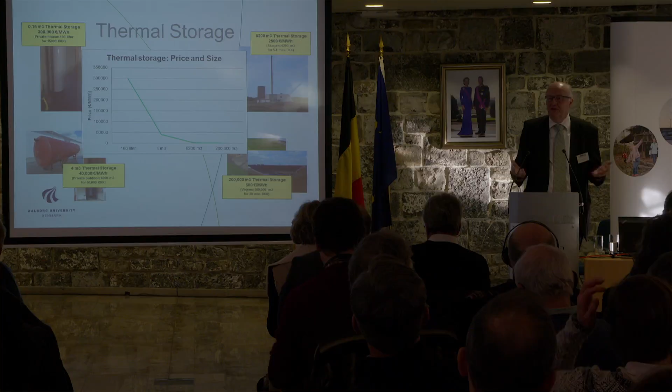And that's why I think that the community level is extremely important here, because if we group up as a community and own a district heating system together, then we have much better facilities, not only for storing, but also for solar thermal and waste incineration and recycling waste heat from a lot of things when we do all this.

Now, this is just to emphasize why the smart energy system approach is so important. When we look into the future, no matter if we do it in Denmark or for the whole of Europe, we use computer models where we model it on an hourly basis, because this is really important. And this is free, everybody can download it, and it's been used by a lot of researchers around the world.

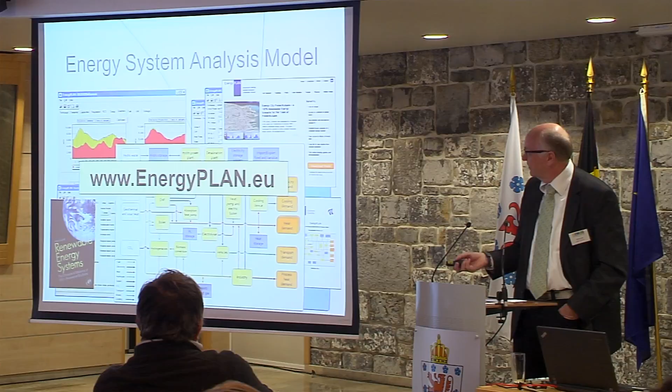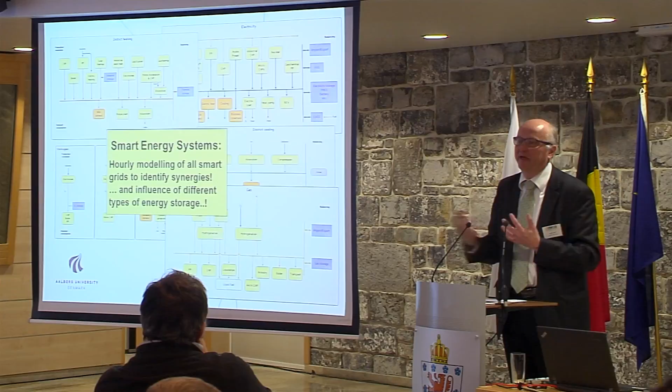But what I would like to stress here is, in that model that we have developed, we do hourly simulations, not only of the electricity, but also of the heating and the cooling and the industry and the gas and the green gas and power to gas and all the things all together. So we can play around with whether we should have electricity storage or thermal storage and so on and so forth.

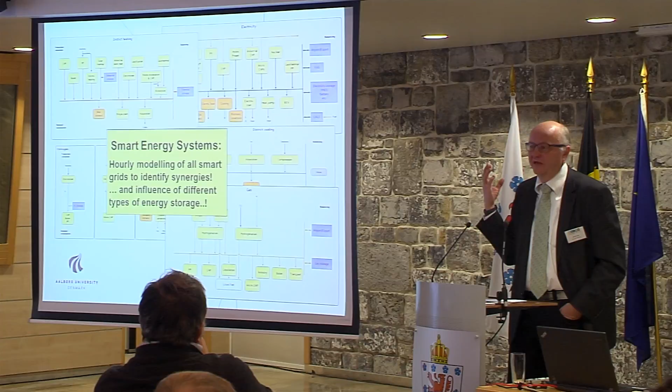And I can already say now the result is that we should not really have any electricity storage apart from the batteries we need in the electric cars. To buy electricity storage to integrate a lot of wind and PV is not really feasible. If we make these kinds of integrated solutions, we can organize it in a way so we can buy much cheaper storage options as thermal heat and as gas and liquid fuel, as I mentioned.

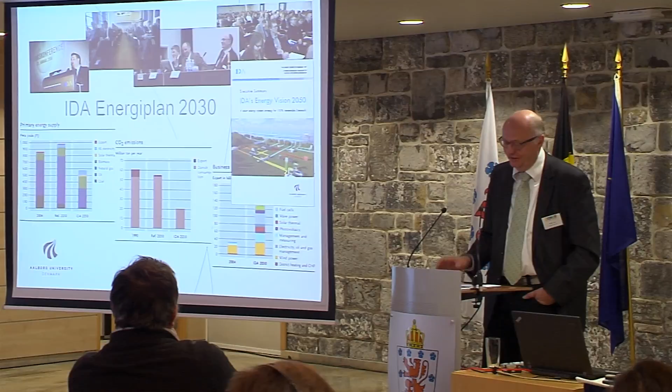We have done some scenarios on this in the Danish context. Some of them we have done together with the Danish Association of Engineers, starting in 2006, because in 2006 we had a government that didn't really care about energy, and then the industry and the engineers wanted to have this on the agenda again to promote the industry and all the things we were doing.

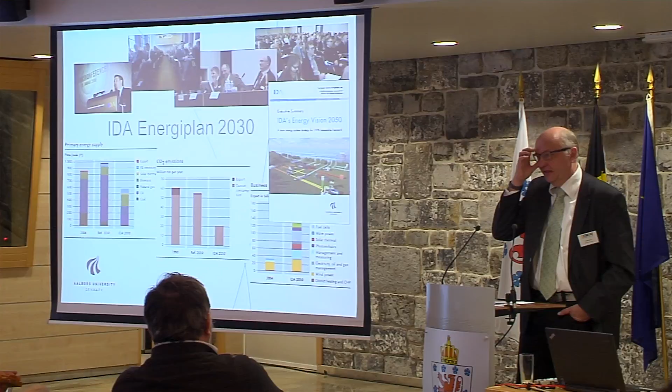And this actually ended up in that the Danish government, I don't know if it was exactly because of that, but it was at least the same year, in 2006 started to have the long-term target of Denmark being fossil-free, and later on it was defined as fossil-free by 2050 and without nuclear, which is the same as a 100% renewable energy society by 2050. That is the target of not only the government but also the parliament, and it's been supported now by at least 4 different governments and 4 different parliaments. So this is the target of the Danish government.

And they're not only saying this as a long-term target, we're actually also doing something. For example, the share of wind has now been increased. The target used to be 20% by 2010, and now it's 50% of the electricity being produced by wind power in 2020. And we are already at 40 as we speak, more or less. And a number of other things are being debated.

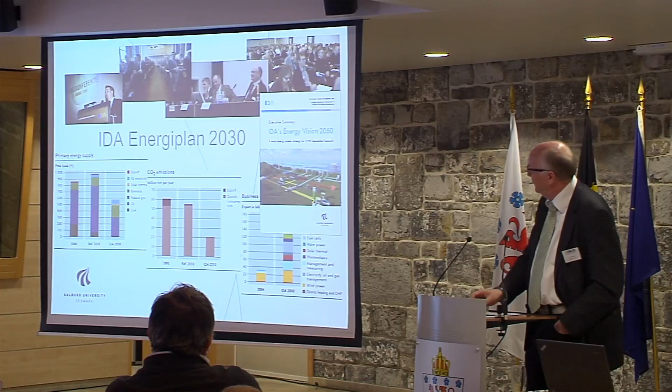But here we look at it, and what we found out is that it is doable to do 100% renewable energy in Denmark. We can find the resources in terms of wind turbines and PV and solar and whatever we need, and also biomass. But there are two really hard corners in doing this when we made the first investigations.

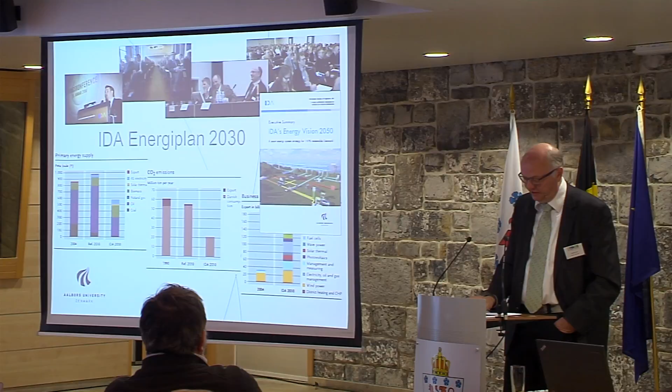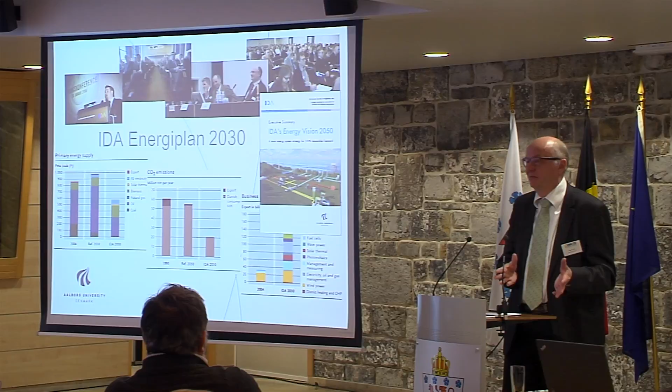The one hard thing is how much biomass can we allow ourselves to use within the energy system and still claim to be some kind of sustainable. That's one really hard question. The other really hard question is what to do about transportation. Yes, you can say electric car, and of course we should, but what about the airplanes and the ships and all these other things? So how should we do this?

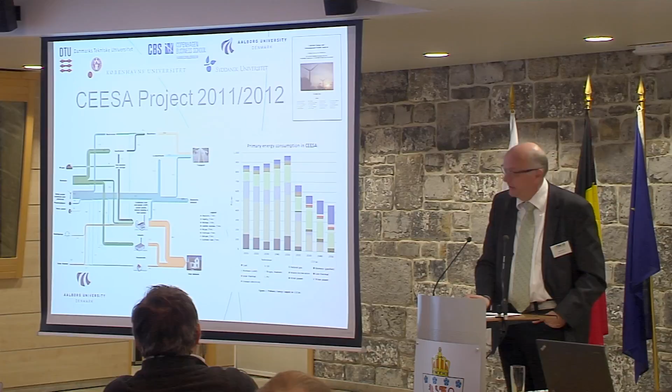Those were the things we took up in a project here that I headed with almost all universities in Denmark participating, and we looked closer into what to do about transportation and biomass. For transportation, as much electric vehicles as possible, electric trains or whatever as possible - that is the best way, the most efficient, the way that will demand the least wind turbines by the end of the day. So the more electric cars, but we cannot do everything electric car. There are the planes, the ships, the long distance transport and so on. So what to do about that?

Somehow we could produce some kind of green fuel, gas or liquid fuel, from biomass. But on the other hand, biomass is a limited resource. We calculated, for example, if we should do transportation in Denmark on rapeseed oil, Denmark is not big enough - if we grew rapeseed on all of Denmark, we couldn't do it. So there is really a challenge there, and we don't want to do only rapeseed because we also like something to eat.

And materials, if we don't have fossil fuels. Taking all this together and limiting ourselves to the residual resources of biomass - that is the manure that we can make gas of, the straws left on the field, the wood chips and so on, and also some of the waste. Well, we put that together, so biomass is a limited resource.

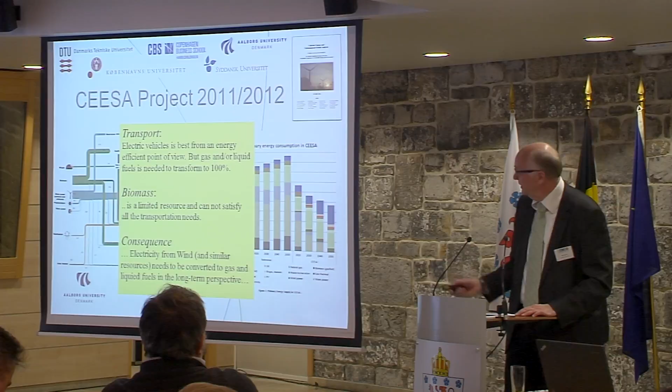But what we found is that if we take as much of that biomass and convert it into some kind of carbon that is liquid or gaseous, and if we then take some wind power and by electrolysis put it into hydrogen - and don't store it as hydrogen or use it as hydrogen, but add that hydrogen to the carbon and then produce some methane or methanol, which I believe is the most obvious way of doing it - then we can do it. Then we have resources enough and we'll do it within something that we can claim is a sustainable use of biomass. We call that concept electrofuels.

This is where we have some kind of electricity with electrolysis and put it into fuels. It can also be carbon. Personally, I'm not so fond of carbon capture storage, but I'm fond of carbon capture recycling or carbon capture utilization, as somebody calls it. So if you capture some carbon from whenever you burn something at the power station or whatever, and recycle it together with hydrogen, that could also be an option.

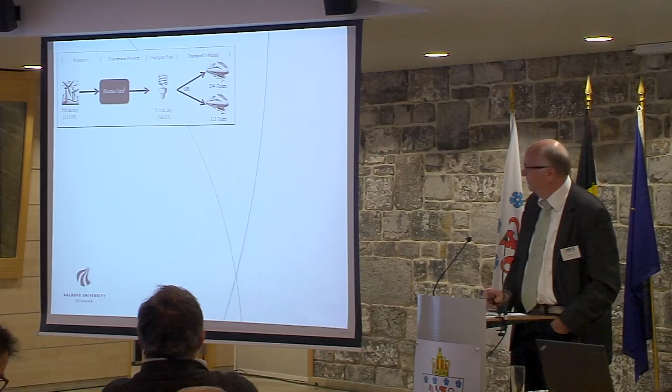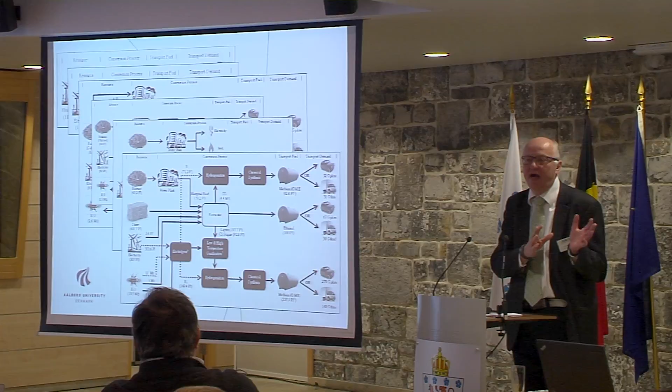We have spent a lot of time looking into how can we do this the best way, and in the book there are all these diagrams. I cannot go into details, but the basic thing about all the diagrams I show here is that we take some carbon from some biomass and we take some hydrogen from some electrolysis and wind, and then we convert it into some green liquid fuel, methanol or methane, a green gas. That's the principle of it. And if we do that, then we think we can make the numbers match.

Now I'll go back to when we take those studies and take them to the European level, as we did in the paper I mentioned. The first thing we tried to discuss was the biomass - how much biomass can we allow ourselves to use? And here it's compared to how much fossil fuels we use.

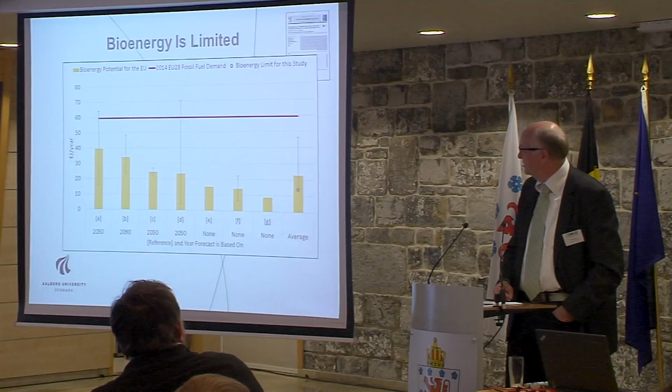We looked at a number of studies, but we also had already made some study, because if you take Denmark, we are sort of representative, both in terms of natural gas resources and also in biomass. If we can do it in Denmark on our biomass, then on average the world should be able to do it - of course, there will be a lot of things around it. So we limit ourselves to a relatively low amount of biomass, and this should be biomass that are only residual resources and are not hindering us from food and from some kind of material. We should use some kind of biomass for material also in the future.

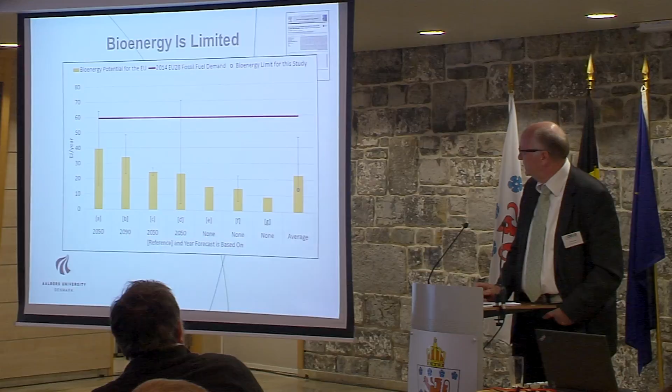Then based on this limitation, we develop some kind of roadmap.

It's not that kind of roadmap. We are all in 2050 in this roadmap. It's more like to explain the changes that we believe and the way we prioritize those changes in order to come to an energy efficient and sufficient 100% renewable energy.

So it's more like step by step. We start our journey from a prognosis by the Commission, the EU 28 countries, on a current policy initiative scenario they made a couple of years ago in the energy roadmap for 2050. So they are already taking us to 2050 with what kind of demands we would have there, and how that energy would look if it was a current policy initiative some years ago.

So it should incorporate all the increases in houses and populations and that sort of thing when we start out. We don't discuss that here — we discuss that in other reports, but not this one. This is where we start out.

The first thing we change — this system is of course based very much on fossil fuels and to some extent also nuclear. So what we do first is something we think there's general consensus on. Of course it will be a matter of discussion if you all agree, but that's how we look at it. Step one is to take away nuclear. We don't want nuclear in the future, so we take it completely away. If there is consensus on that or not, we can debate, but that's how we see it.

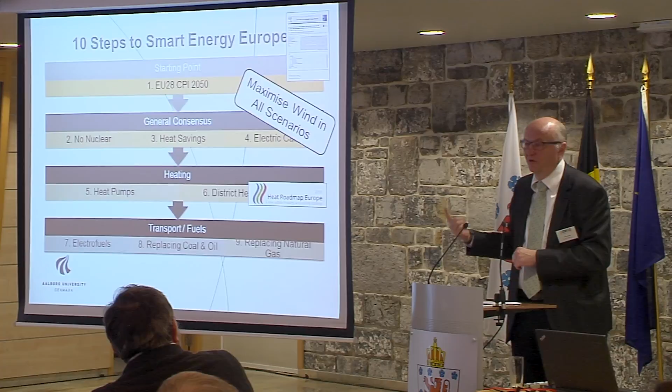And then we could also replace, and that is step 9, that is more debatable, but we could replace the natural gas by doing carbon capture and recycle and hydrogen and more wind turbines, as I mentioned before. Just for the heating, I'll start by showing this one, Heat Roadmap Europe, or some studies we did for the whole of Europe.

Some of the things we showed here is that right now, if we take the electricity production in Europe on thermal units, the waste heat from that is more or less equal to the total heating of all houses in all of Europe. It's more or less the same number.

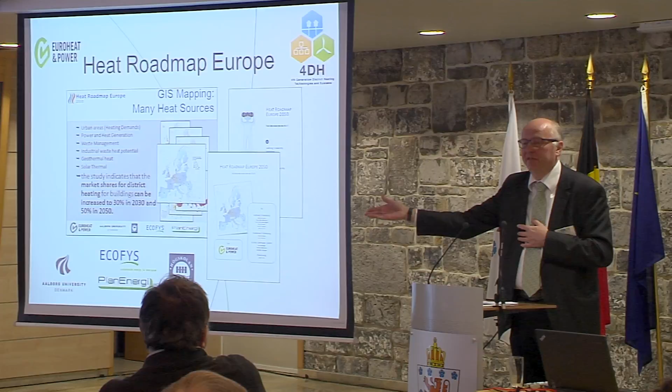So if we could somehow take some pipes from the local power station to the houses all over Europe, then we could stop importing a lot of gas and oil. That's not what we do. Instead of going that one kilometer or a few kilometers, what we do in Europe mostly is that we drill in Siberia and take the gas around the world and into each house, while the waste heat is wasted.

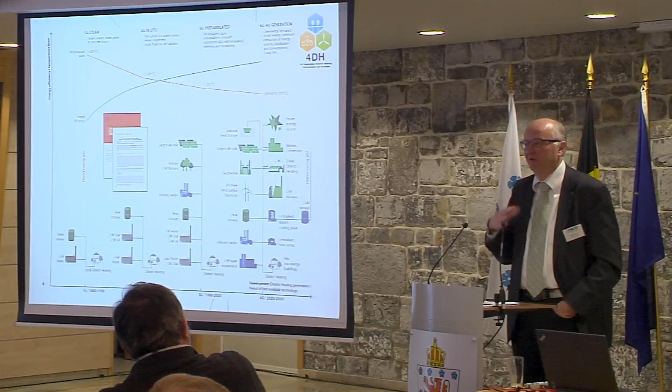And we really got, and it's not only, as I should show here, because in the future there will be less thermal power, of course, because we have more wind power and PV and so on. But then there will be a lot of other waste heats that we can benefit from here.

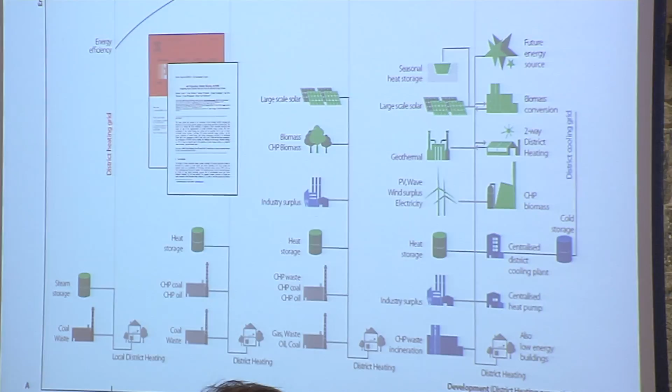There will still be the industry. There will be all the energy conversion as we foresee it, from taking biomass into liquid and gaseous fuels. There will be all the electrolysis and so on. So there will be a lot of waste heat also in the future. And of course, we should also save energy for the houses.

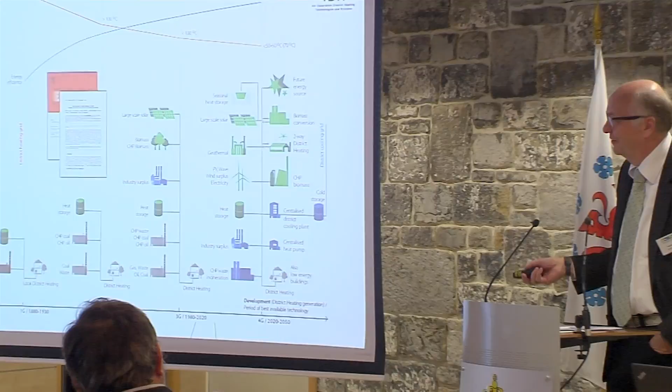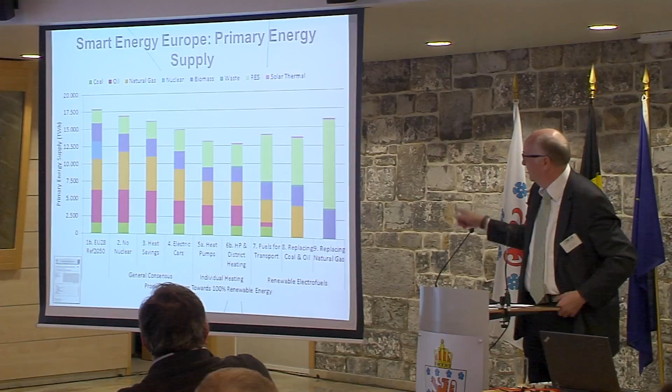My 5 minutes are more or less spent here, so I'll rush through. This is more showing the numbers of all these steps here. This is the primary energy supply. You can say it's step by step, coming from the fossil fuels, gas, coal, and oil, and nuclear, and then ending up in biomass and wind, or renewable energy.

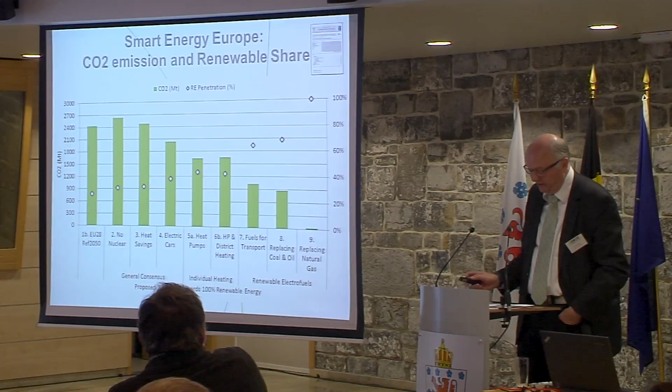But one major important thing about this kind of investment, and this is also very important for the local communities, of course, is that if we end up in the fossil fuel scenario, then we spend all our money on importing oil and gas, and maybe also coal in the future.

While if we end up in this other scenario, then we spend all our money in construction works, like district heating pipes and insulation material and wind turbines and so on and all sorts of things. And if we can do that construction in Europe ourselves, and I believe certainly we can, maybe we're the best to do it as it is, then this will mean jobs.

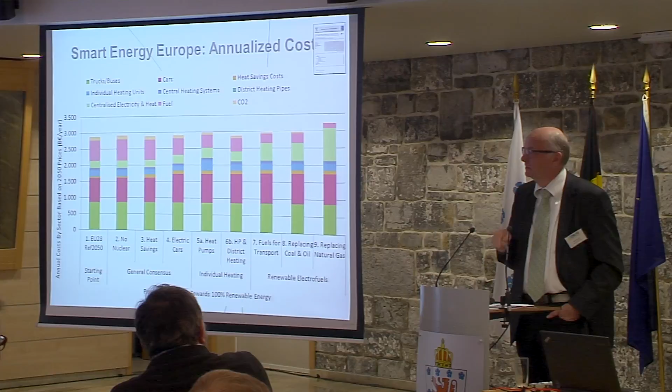For the Heat Roadmap Europe study, we calculated that doing district heating instead of importing gas will mean 200,000 jobs in Europe on a permanent basis, at least until 2050. So there's really a lot of jobs here, and really a boost of the economy.